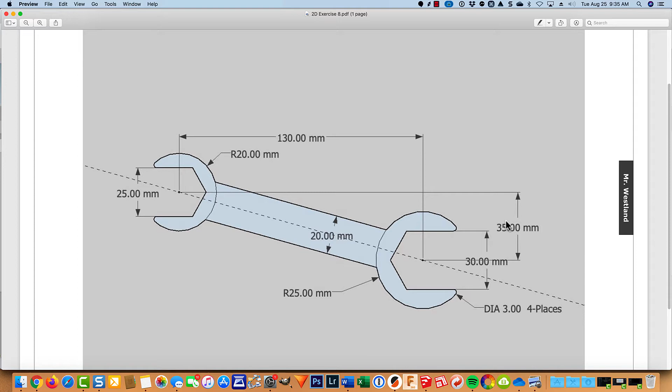So let's go ahead and get started here. I have my drawing inserted as a reference, which makes it pretty handy, and I have a new SketchUp file that I call 2.8 Westland. Go ahead and save it however your teacher asks you to save it, and of course I'm working in millimeters.

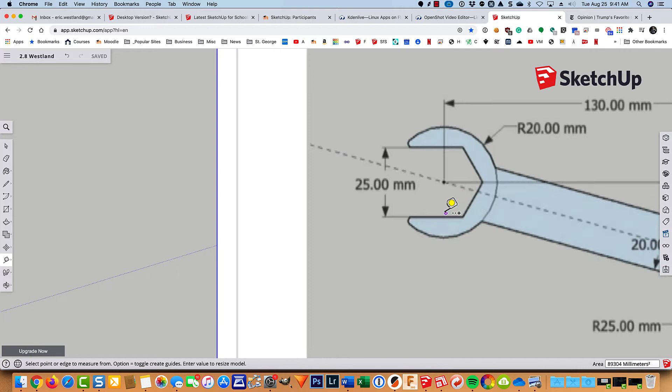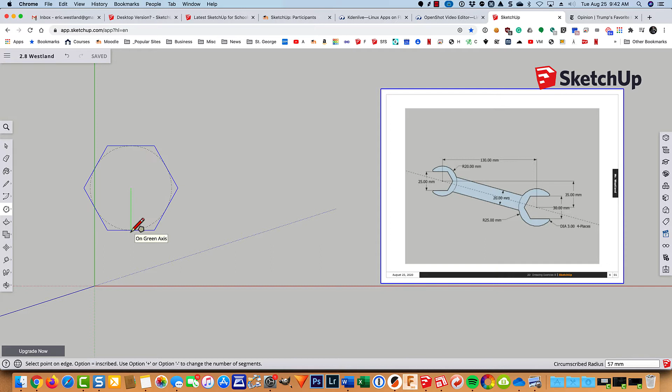So I'm going to go ahead and work on this end right here, and go back to our good friend the polygon tool. I'll look down at the lower right corner to make sure it's 6 sides, and I'll just kind of eyeball it and click about right there. This is showing the radius of the polygon, but I need the apothem, so I'm going to tap my option key once, click, and the apothem needs to be half of 25, so I'll type in 12.5 and hit enter.

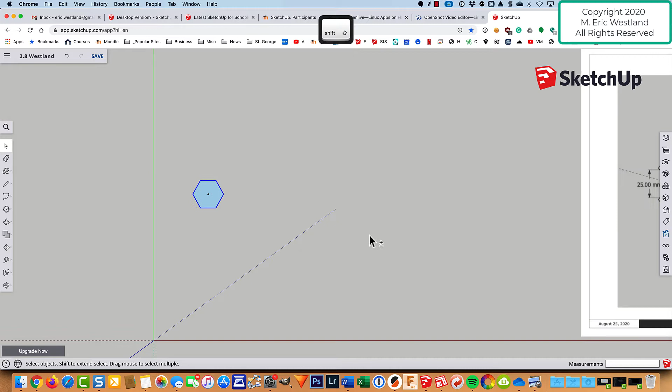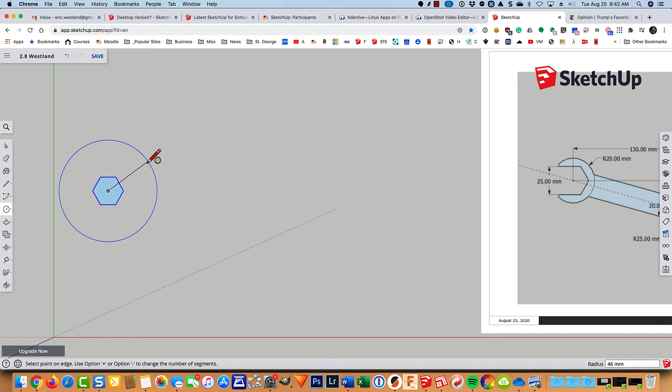Since this is just a form of a circle, I'm going to go ahead and find the center, so it puts that little center mark in there for us. Now I need a circle, so I'll click here. Right now it's telling me the sides are 24, I'm going to change it to 50, hit enter. I get a little hint there next to the pencil that it has 50 sides. I'll click, pull out, and the radius of that is 20 millimeters, so I type in 20, hit enter, and I've got that part of the wrench done.

So now I need to take my tape measure tool, and let's see, I'll just come over here so you can see what I'm doing. Next thing I'm going to do is come across 130 and down 35. I'm just going to grab that center and pull a guideline out, type in 130, hit enter, and it gives that a little tick mark. Then I'm going to snap to it and pull down and type in 35.

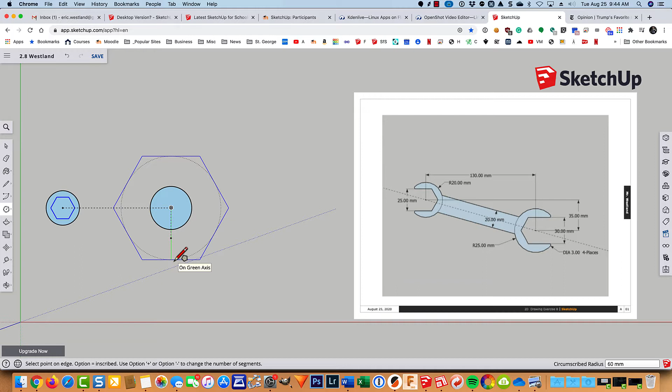So now we have our second center mark right here, so I'm just going to go ahead and quickly repeat that. I'm going to make the circle first since it's already selected, and it has a radius of 25. Then nested in there is the polygon tool, so I'll click on it, pull out, tap my option or alt key to switch it, get it straight up and down so that it's vertical with the green axis, and that has a total height of 30 millimeters, so I need 15, which is half of 30.

Except I put it in the wrong spot, didn't I? You probably saw that coming. So here's what I'm going to do: I'm going to use the move tool. First I'll select the circle, hold down the shift key and select the hexagon. Now I'm going to type in M for move, grab it right there, and pull it down there. And so that is now corrected.

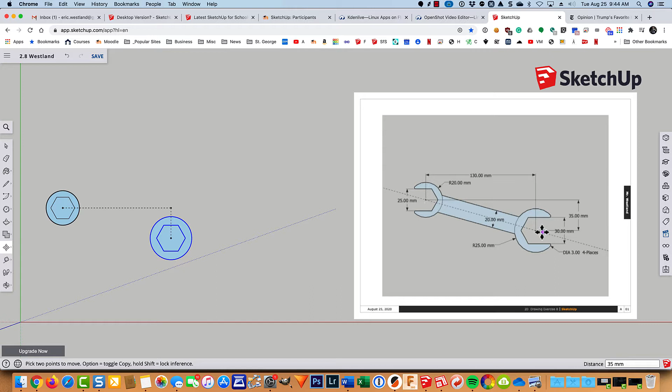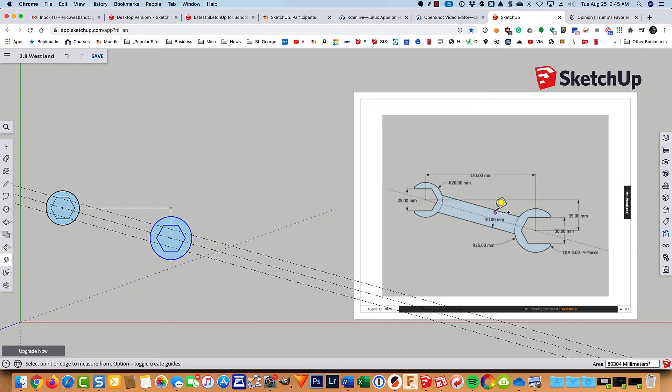Now I need a guideline along here, an offset, so again, T for tape measure. You could use just a regular line, draw one with a pencil and then erase it if you want, but what I like about using the tape measure is that when I let go of it here, it creates a guideline that goes off infinitely. So I'm going to left click, holding down the button, click and drag up and put in 10, then grab that center line again, drag down, type in 10, and I've now got this width of 20.

So now I can take my pencil tool - it's not pencil tool, it's the line tool. You have to be really careful here, because see how it wants to jump to an endpoint? You want an intersection if you want to be precise. So then I come into here - I don't want it to snap to like a midpoint or an endpoint, I want it to be the intersection of those two edges. Then I do the same thing here.

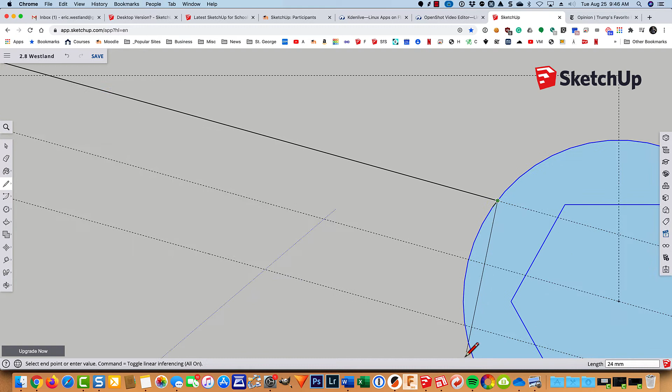Oh, I drew that line like that. That's okay, we'll just come and erase that in a minute anyways. And then I come up here, and if you want to draw accurately, use your zoom tool or your wheel on your wheel mouse. So let's do some cleaning up now.

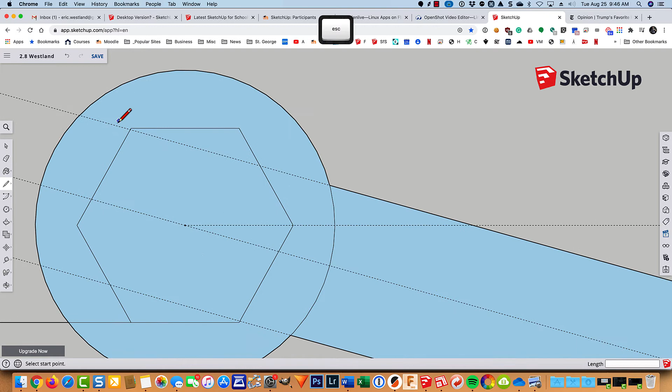Oh well, I've got the line tool. I'm going to go ahead and draw from here just out to there along the red axis. Hit escape, draw from there out to there along the red axis. Hit escape, from that vertex to there. And then up here I need to zoom in, be kind of careful, and pull out. I'm just going beyond that edge. I could stop right there if I wanted.

So now let's do some cleaning up, some erasing. So that goes, and that goes, and that goes. So there's one end of the wrench. See, there's a lot, that extra line that I drew that I don't need.

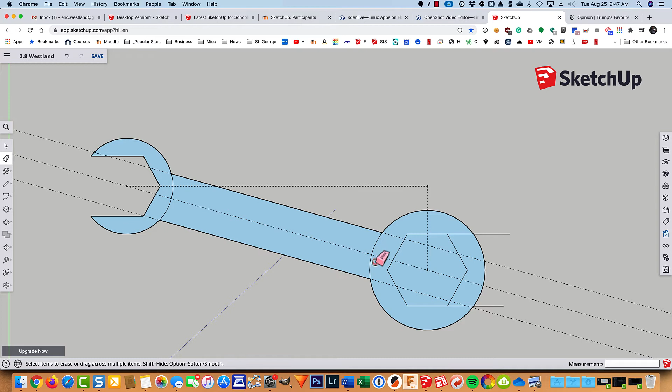Then we'll clean up the other end in similar fashion. I'll erase that extra line that I created, and then I'll cut that out, and that out, and this line segment, and that line segment, and that end is done.

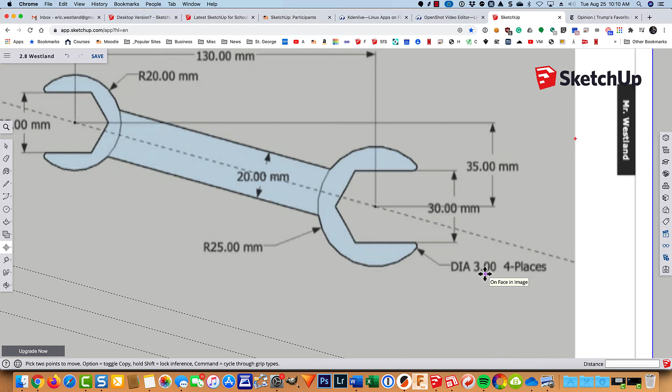The last thing we need to do is round off these four tips here, up here, and over on the other end. They are rounded off by an arc that has a diameter of 3 millimeters on all four tips. Now, if we were using a fancy CAD program like Inventor or Fusion 360, which can work with real circles, we could use the tool called tangent radius, and your teacher's probably familiar with that.

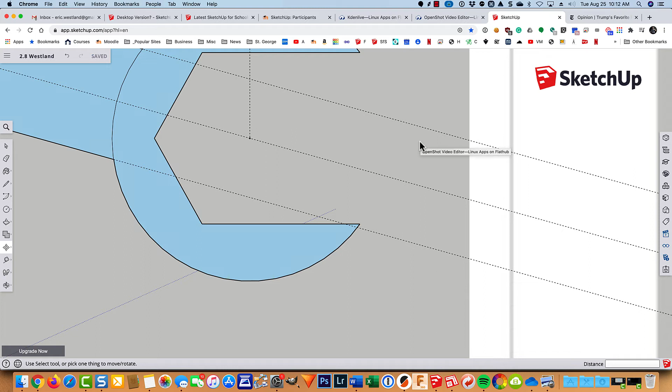However, you can't do that in SketchUp because, again, it doesn't draw circles. It draws polygons with a whole bunch of short little straight edges. So we're just going to have to go ahead and spitball this as best we can, but it'll end up doing a pretty good job.

C for circle. I'm just going to put a circle right here for now and give it a radius of 1.5, which is half of the desired 3 millimeters. And then I'm going to use my select tool to draw a selection rectangle around the face and the circle or the edge. Type in M for move, and I'm going to pull it up here, and I'm going to zoom in.

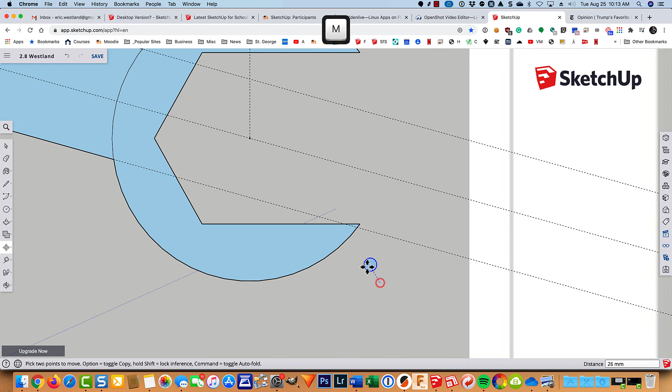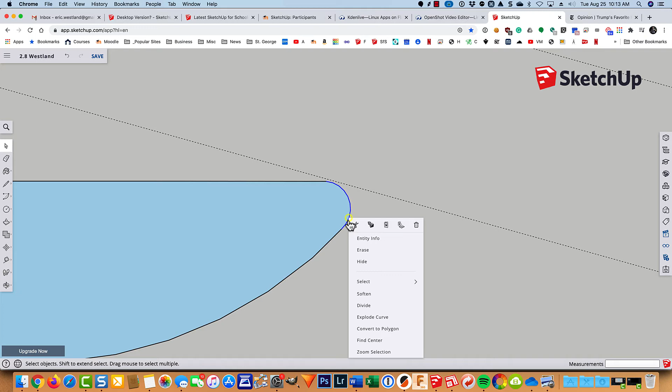Oh, didn't mean to click there, so let's undo that. I'm going to get up here just as close as we can. And that looks pretty good. And if we did it right, we should be able to take and erase this edge, and that part of the circle. And as long as I'm zoomed in here, I'm going to click on that and find the center.

So that worked pretty good. So we'll go ahead again and type in C for circle, put in 1.5, then select it. You can also just double click on it, and then M for move, and zoom in. Oh, now see how it's kind of jumping around?

And I'll show you how we fix that. What we need to do, I'll just go ahead and park it out there for the moment, is we need to go into our model info. And when we look at it, the default settings are set up for millimeters, which is good. The precision is 0 in decimal millimeters.

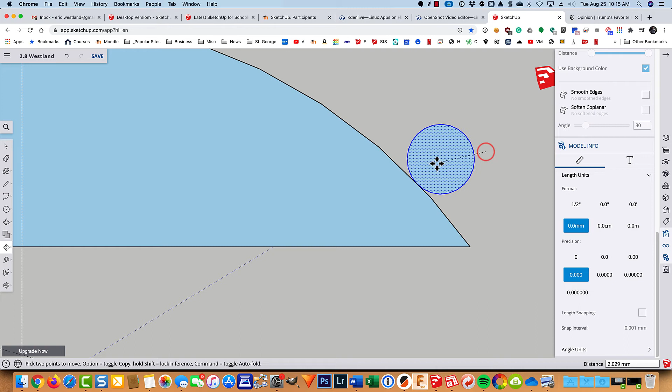So let's just go ahead and click it right there, and then let's turn off length snapping, and let's see if that helps. Oh yeah, it's now really nice and smooth.

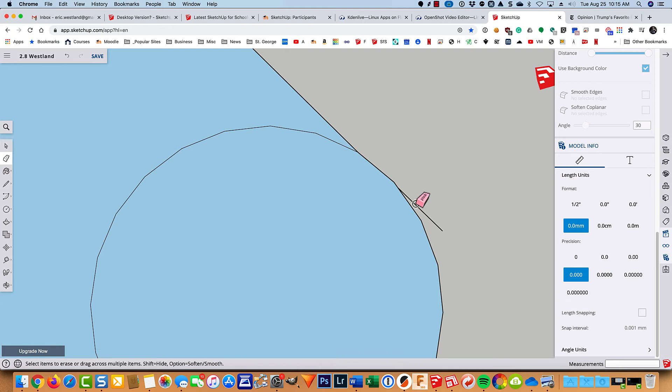So what you want to do is you just want those two edges to touch, and it doesn't have to be perfect. And then use our erase tool to erase those two edges. Got a little extra one right there. Let's see here. Yeah, see, I didn't quite get it tangent to this line, but that's okay.

And so we need to erase the rest of this. So I'll just kind of come around like so. Again, how fast you can drag across these segments is going to be a function of how fast your computer can work behind the scenes.

Okay, let's go ahead and get the wrench finished up here. I went ahead and did the other tips, rounded them off. Didn't figure you needed to see that.

So let's just go ahead and add some dimensions here. Actually, before I do that, I'm going to take and erase these extra guide points, or guidelines.

We don't really need these anymore, but I am going to keep this center line in here for the time being. Let's get our center marks put in also.

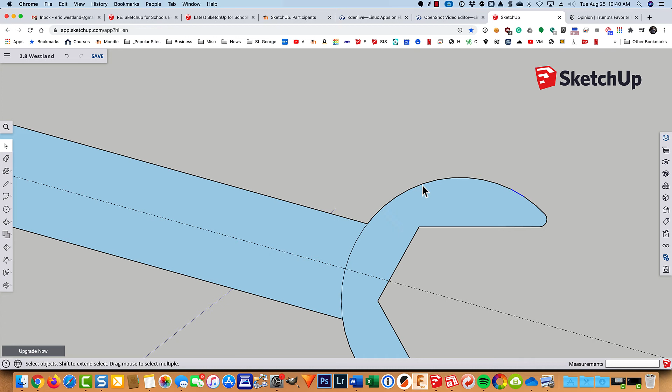Grab the select tool. Now this is only showing a segment, so this part of the circle got exploded, and that happens sometimes when you do some trimming, probably on the end. If we try to put a dimension on this arc, you see it's not a radial dimension, it's a linear dimension, which doesn't do us any good at all.

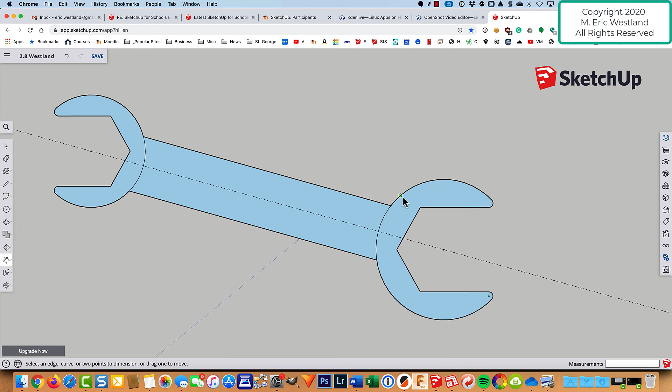This here is still connected, right? So I can take this and find the center, because it's the same center. While I couldn't find the center using this arc up here because it got exploded, this one is still glued together, as is this one. So we're in good shape there.

Now we'll come back into our dimension tool. Where do we start? I'm going to start from this endpoint down to that endpoint, and pull up like this, so it's 130 millimeters. Then again the same point here, the same point here, but this time I'm going to pull out to the right so it's measuring vertically.

Let's grab from this point here down to that point — yep, should be 30 millimeters. So we're good there. Let's do the same thing here. Lots of different endpoints that you could go ahead and grab.

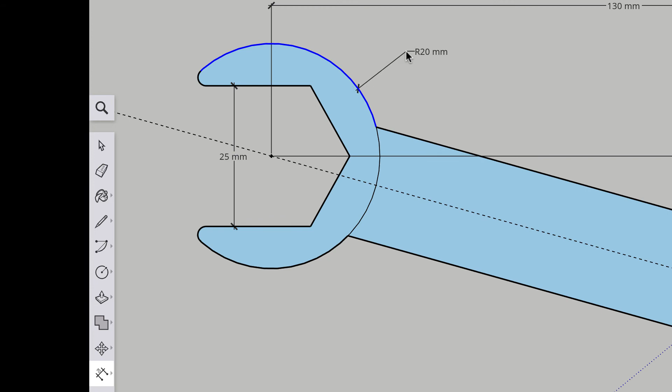Okay, so now let's do the outside radius of these. That has a radius of 25, and maybe I'll just bring it about right there. And then this one here — okay, see, it's not highlighting an arc. Here it does, and up here it does, so let's just put it up here. We'll put 20 millimeters there.

And let's see, what else do we need? Oh, the tips. So next we come down here and measure this arc, and it says it has a radius of 2 millimeters, and I know it's supposed to be 1.5. Does that mean I did it wrong?

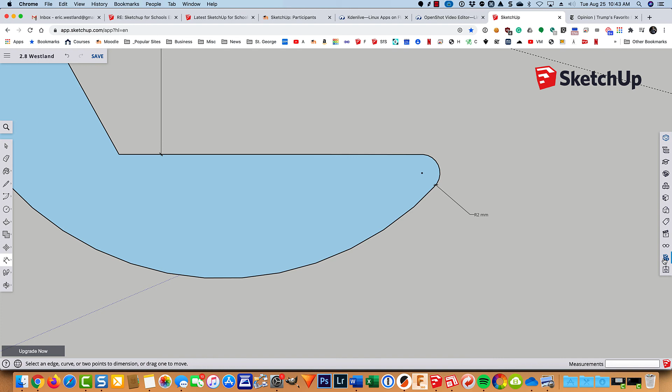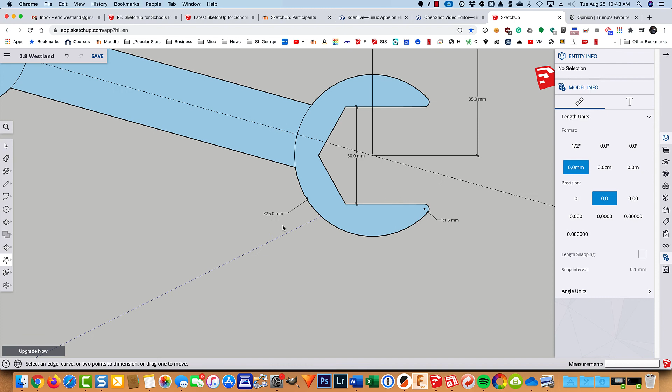No. Let's go into our model info, and you'll see that the precision is set to the nearest whole number, so it's rounding 1.5 up to 2. If I change it here, see, now it gives me that decimal point. So while all the other dimensions can be whole numbers, that one needs a precision of at least 1/10 of a millimeter. I'll go Shift Z again, and we'll close that up for now.

So next I'll go ahead and put a dimension from here down to here, and it tells me it's 35 millimeters, so I can click on that. I'm going to call that good.

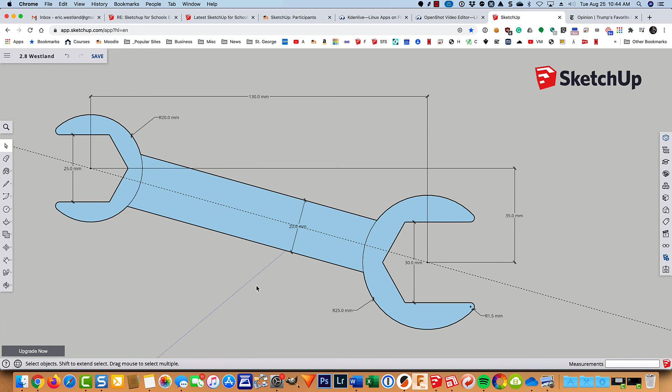Now I'm going to show you how we can make this look a little bit different. I'll come up here and open the entity info box — right now nothing's selected, but if I select this dimension, it tells me what the text is. I can change the font, go ahead and change it to say 18 so it's a little bigger, and I can change the endpoints from tick marks to arrows if I want to.

Now, if I do that to one, I should probably do it to all of them. It would be tedious to go through and do that one at a time, but as long as I don't mix up my linear dimensions with my radial dimensions, I can change them all at once.

So I'll go ahead and select this dimension. I've got that one selected. I'll select that one, and that one, and that one. Now I've got 5 linear dimensions selected, so let's change all of those to 18 at the same time and change them all to arrowheads.

Then we can do the same thing for our radial dimensions. I'll click on 1, hold down my Shift key, click on 2, click on 3 — that's all I need. Up here it tells us we have 3 radial dimensions, so we'll change those to 18 and change the tick marks to arrowheads.

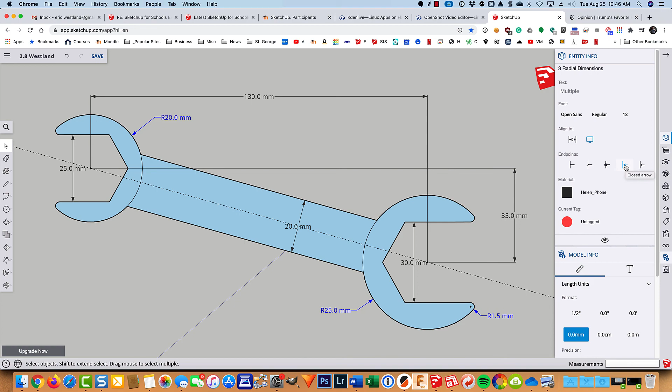And so there you go — there is our open end wrench of metric style, and this concludes the 2D drawings, unless your teacher wants to assign some extra, or I've included a couple of assignments that you can go ahead and do on your own.